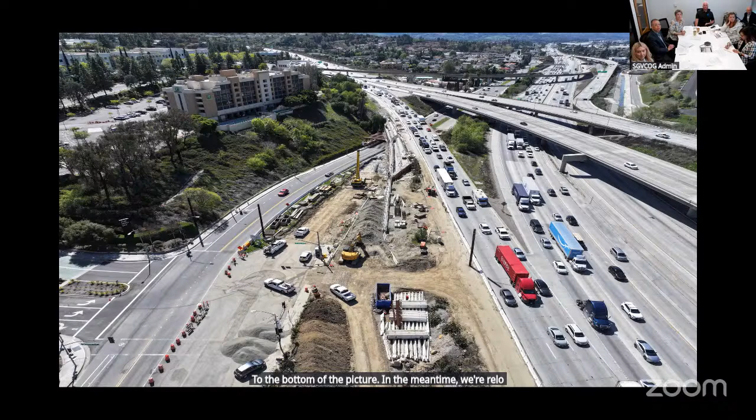This is a little further north of that bridge. That huge vertical cut is retaining the parking lot and the soil behind it, but you can see the walls taking shape. That gives us the area to start building the bridge. If you've driven out there, you've seen the big rig driving huge steel piles into the floor, about 125 to 130-foot piles. Once we drive those, that allows us to build the base for the retaining wall, and they'll start taking shape. That is the 57 northbound in its future alignment. That cutout next to the hotel is going to be the bridge column for Grand Avenue.

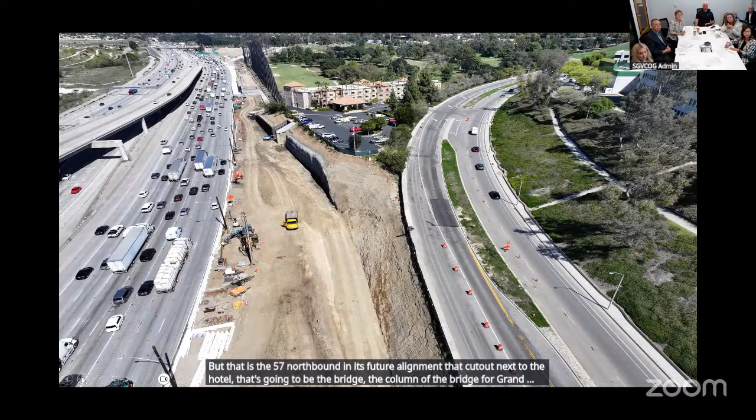Next slide. As we head towards Grand Avenue, we completed a huge milestone. We were able to get Edison to complete their work. We've been fighting for resources ever since the fire, so we've been working weekends and nights over the last couple of days. They finished the cutover. The only thing left is for us to do the wrecking, which we can probably do.

But as you can see, the grading is starting to take shape. In the coming months, we're going to shift traffic towards that new dirt area once we pave it, and that's going to be the new on-ramp and off-ramp for the freeway. Edison's out of the way, so hopefully that clears the schedule. I can take any questions on 5760.

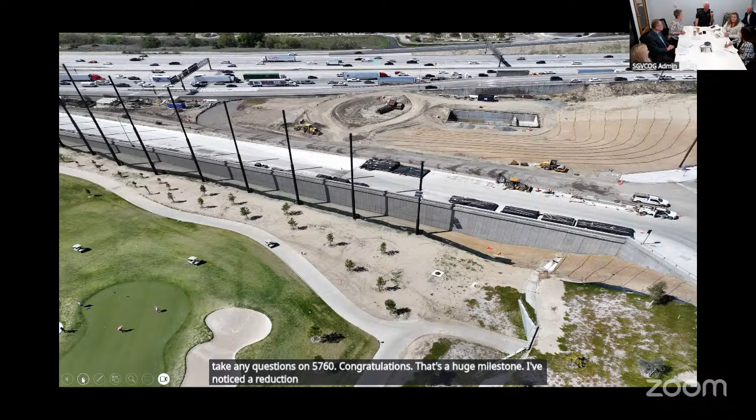That's huge, congratulations on getting Edison. That's a huge milestone. I agree. I've noticed a reduction in traffic too coming down south into the bowl. It's not as bad as it used to be. I don't generally jump on because I go through Diamond Bar to spend my money.

Thank you very much, we appreciate it. But honestly, it is smooth, not a lot of stoppage. You still have the crazy trucks, way too many trucks, but that's just the way it is. You guys are doing a really good job. It's looking good too, and it's clean.

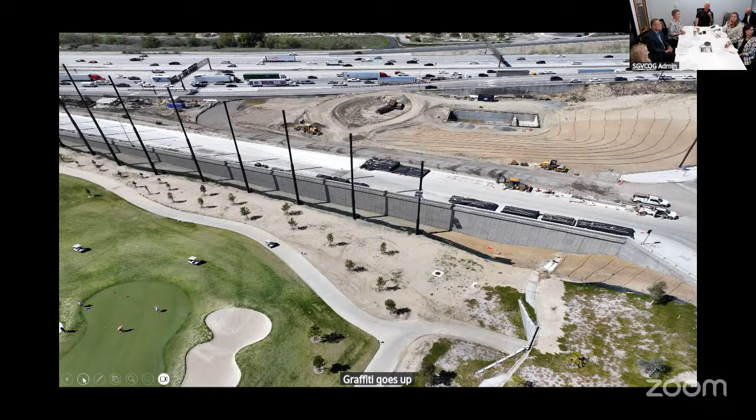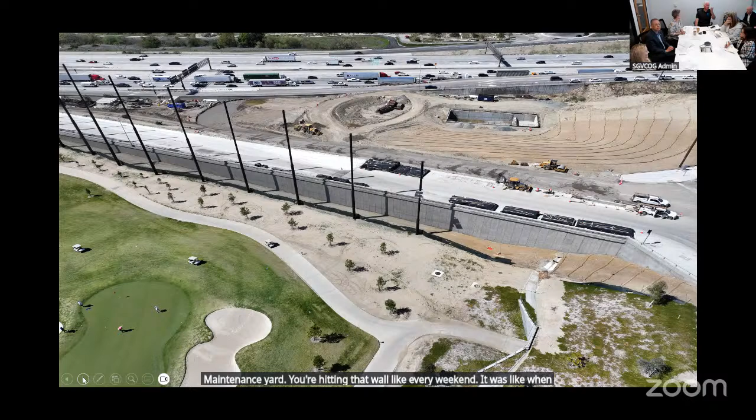You guys are keeping a clean job site. Graffiti goes up and it's gone in seconds. Everybody's on it, like the next day I'm going, hey, that was there. We had a 20-foot long by 8-foot wide graffiti mural on one of our new walls, and you have to power wash it off. They were hitting the maintenance yard, hitting that wall like every weekend. Anyway, you guys are doing a great job. Thank you, thank you, yeah, looks great.

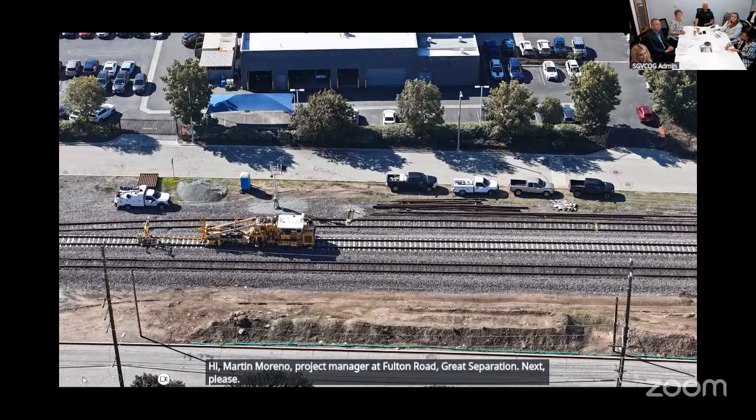As you all know, we've been trying to schedule with Union Pacific to schedule the cutover. This picture was taken approximately...

Did you say Union Pacific or Jesus? Just checking. Well, they showed up.

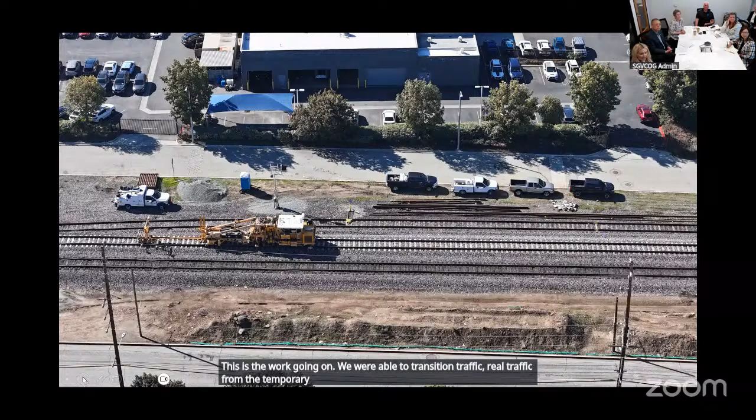They showed up approximately 30 days ago, the weekend of the 8th and 9th of March. This is the work going on. We were able to transition rail traffic from the temporary shoofly over to the new main lines that were recently constructed. And this is UP doing the work.

UP insists on a 30-day seasoning period where they want to make sure the tracks perform as designed before they allow us to remove the shoofly. So we should begin reviewing the shoofly removal. 30 days is Wednesday. Next slide, please.

Once again, these are the pictures there. As you can see, this is 99 Ranch Market. This is the shoofly to the left, and the new tracks to the right that we're extending to the new main lines. That's the Nogales Bridge to the top, where it reconnects back to the main line.

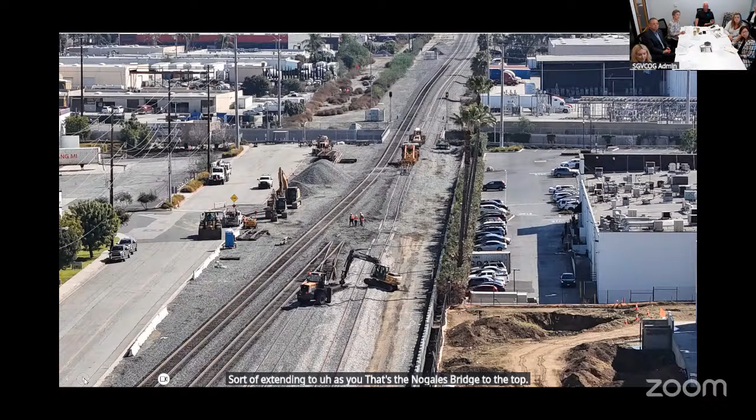Next slide, please. Once again, you can see the new rail traffic on the actual UP bridge. The way we did it, we built the south half of the bridge first, so there's main line 1 and 2 on the south half. Once we remove the shoofly, we will construct the north half of the UP bridge.

We should begin work to remove the shoofly on Wednesday. Currently, in order to try to regain some of the time we've lost, we will be doing the removal of the track at night and then the hauling away of the track during the day.

We're doing that to get around UP's moratorium - you can't do any work on their right of way between 4 a.m. and 11 a.m. So we're trying to do that work at night, remove the tracks off the right of way, then have the track transported away. Once it's off their property, that's allowable, so we don't need a flagger at that point.

What's your time frame on the digging of the other side? As far as getting everything dug out and starting to put steel and concrete in on the other side?

Condon Johnson - what happens is, see these big piers that are here, those are probably 72 to 96 inch piers. That work will start on the 15th of next month.

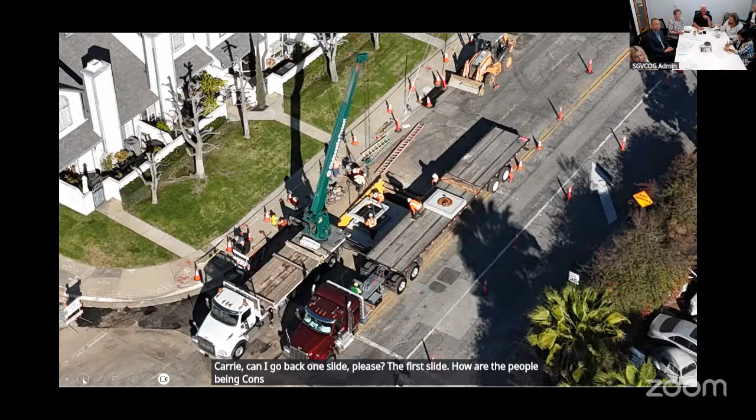Carrie, can I go back one slide please, the first slide. How are the people, considering this construction is in their front yard for a long time, how are they handling it? I know we're doing outreach, I saw your outreach stuff and I know you're giving information.

So it's been quiet, I think people are getting used to the construction in their neighborhood. It doesn't mean we've stepped back our efforts, we're still there, Maria Cano is still there every day. In fact, she'll be out there again this week because we're doing a cutover for one of the water lines, which is gonna require a shut off. Shut down? Ooh, how long?

Like a night, like 24 hours. Just make sure it's after shower time please. Wait, we're 24 hours? We're trying to provide nice porta potties, like the kind you see on a movie set, the ones you walk in, they're nice, have air. Yeah, whatever you gotta do, be gentle.

I have the electeds, we haven't heard anything. I don't know if Marissa or Director Liu have heard anything from the electeds in Montebello, it seems like things are going really well. I just wondered because this has been months and months and months, and if it's quiet, that's a huge testament to how staff and the outreach is going. Agreed.

Plus the lawns are, kudos, great job, look at the lawns. Yeah, the lawns are great. Okay, sorry, we just- Mr.

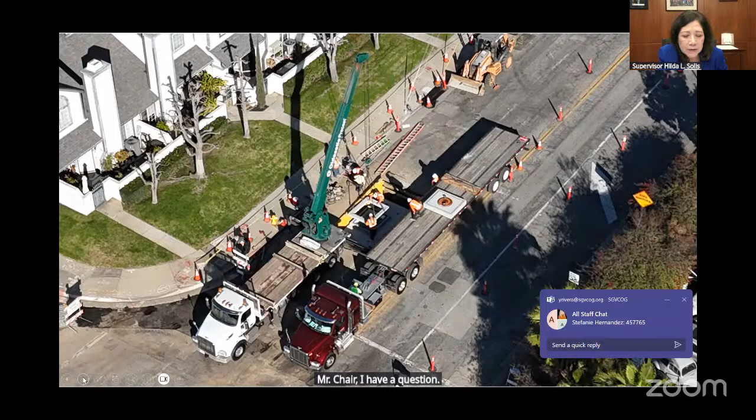Chair, I have a question. If water is gonna be shut off, are we doing anything to give water bottles or some kind of incentive there to help folks out, in addition to the porta potties? Yeah, that's a good question, Supervisor Solis. That's something we should probably look into, making sure they have bottled water, or at least a case of bottled water each, just to get them through the day. It'd be nice just to drop it off.

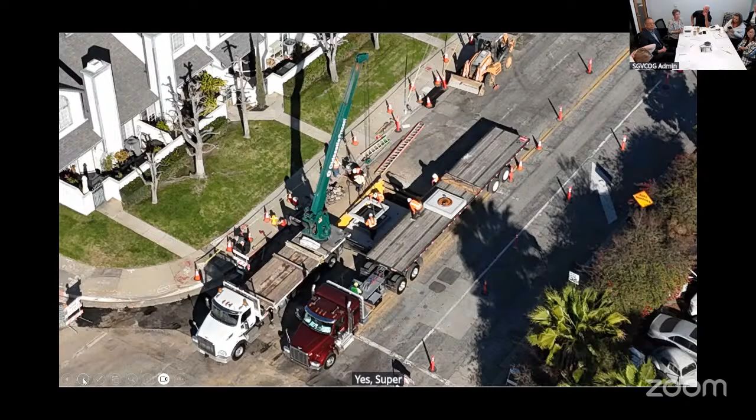Maybe put our COG logo on the bottle. Not a bad idea, cooking or something. Yeah, just saying, let's brand it. Yes, Supervisor Solis, we can definitely look into that. Okay, thank you.

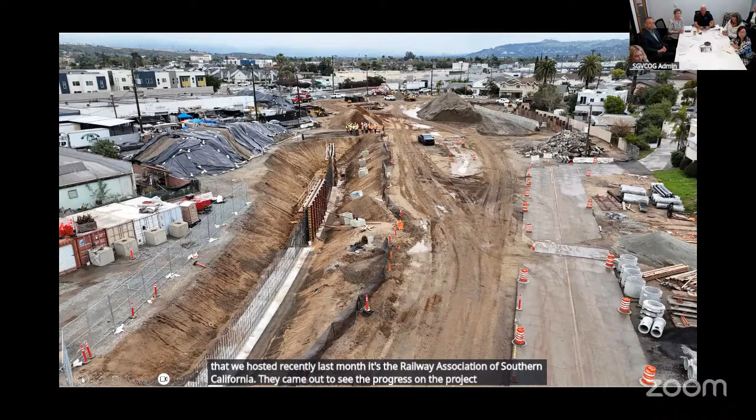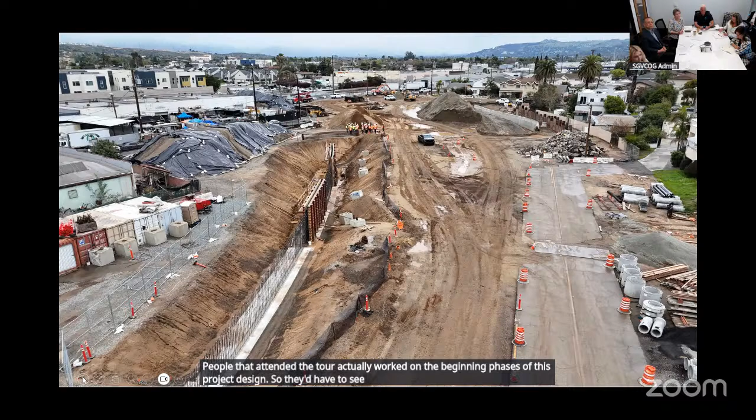That was a tour group we hosted recently last month, the Railway Association of Southern California. They came out to see the progress on the project and are very interested. A lot of the people who attended actually worked on the beginning phases of this project and design, so they're happy to see the project coming to fruition.

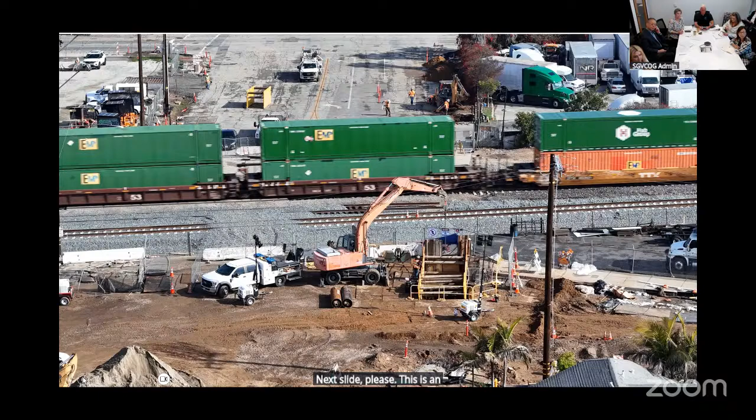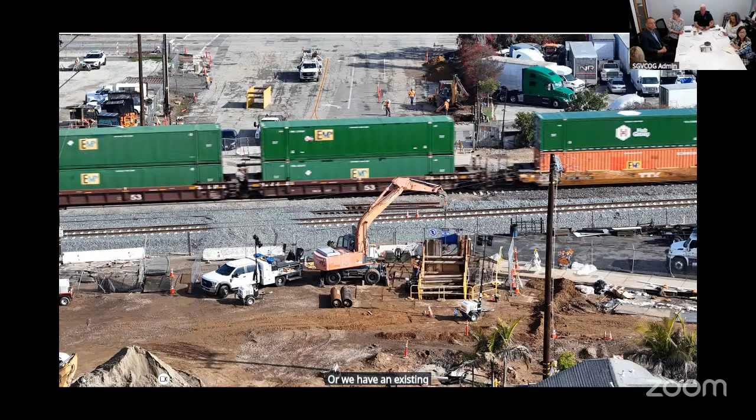Next slide please. This is an Edison milestone, the jack and bore being done. I spoke about it last week, where we have an existing overhead line on the west side of the intersection, and we're in the middle of relocating this overhead line to an underground position.

What you see here is the jacking pit where the casing with the auger in the middle is being lowered into the ground, being jacked under the railroad tracks. The crews you see up top, that's where the receiving pit is. That's a huge milestone for us - we couldn't proceed with any work until this was done. We're super excited that this has been completed successfully, and it was an awesome experience to see it.

Is there one more slide even? Yeah.

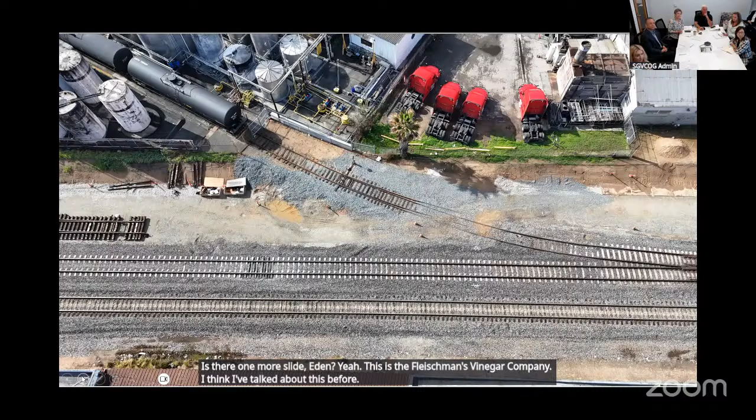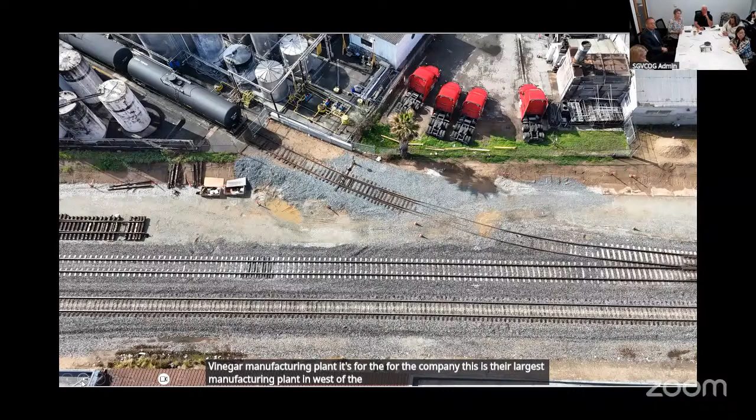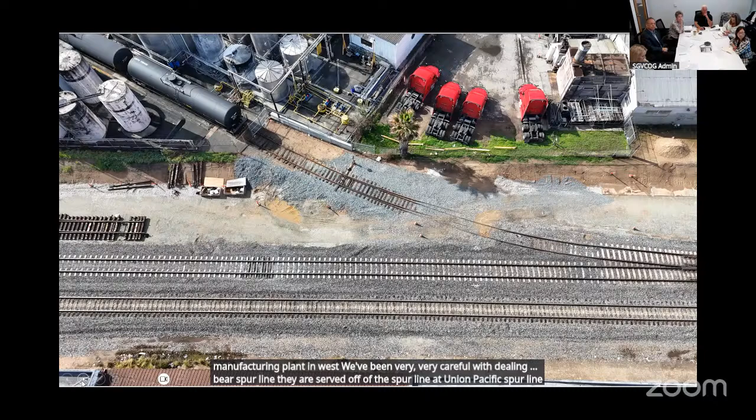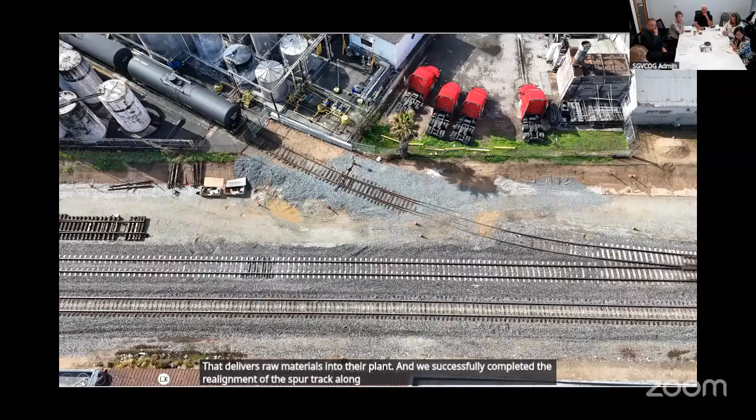This is the Fleischmann's Vinegar Company, which I've talked about before. It's a vinegar manufacturing plant, their largest manufacturing plant west of the Mississippi. We've been very careful dealing with their spur line - they're served off of this Union Pacific spur line that delivers raw materials into their plant. We successfully completed the realignment of the spur track, along with some improvements to their plant in the form of a new fence and a new berm.

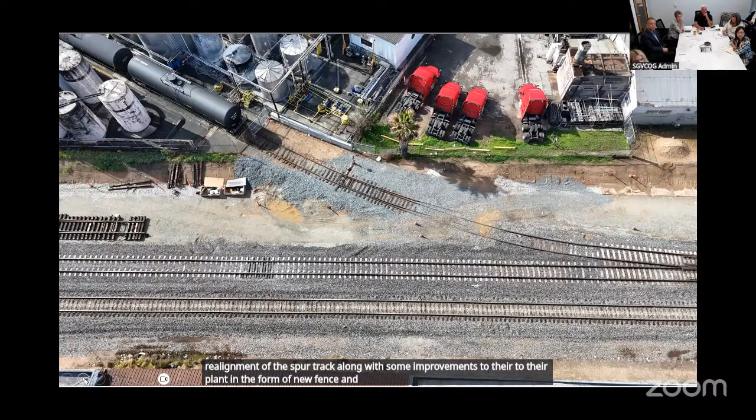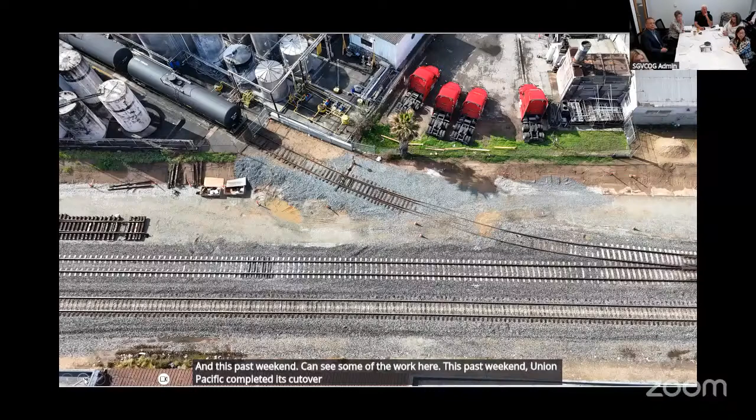This past weekend, you can see some of the work here. Union Pacific completed its phase 1 cutover of the mainline tracks onto the phase 1 shoo-fly line. So we achieved 2 major milestones in the last month with Edison and UP.

Oh, it's nice to see UP. Sounds like someone got into their ear and they're actually helping us. Thank goodness we have new electeds in those categories. So any questions for staff? Oh Lord, thank you, thank you Carrie.

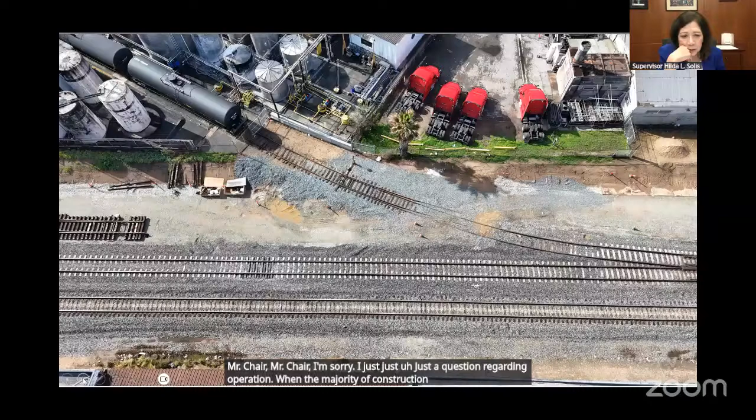Mr. Chair, I'm sorry, yes, just a question regarding operation. When the majority of construction is being done, is it in the morning until like 5 o'clock, 6 o'clock, or does it go on in the evening? I'm just wondering about noise for the residents.

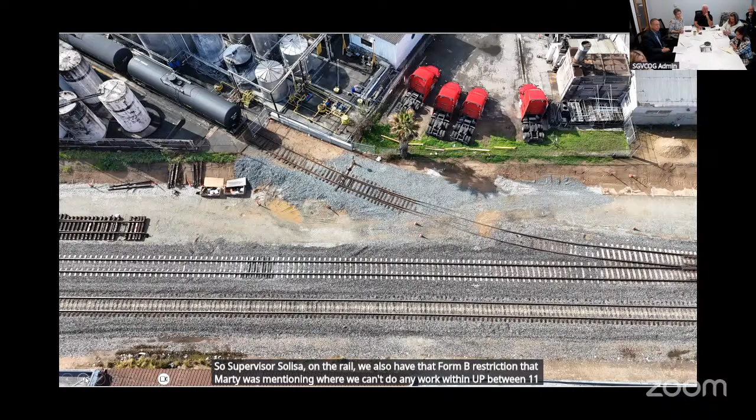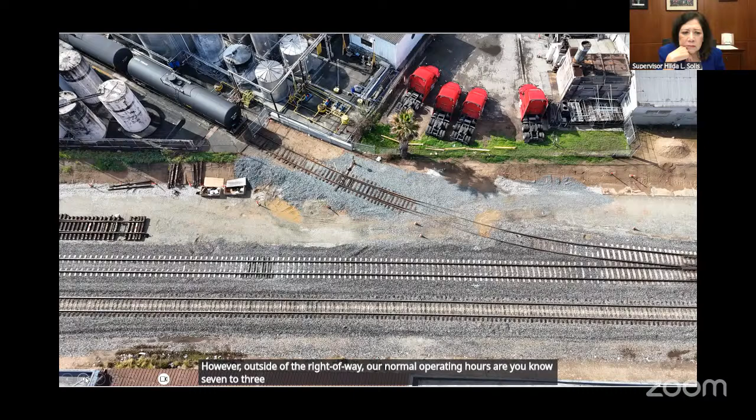Supervisor Solis, on the rail we also have that Form B restriction that Marty was mentioning, where we can't do any work within UP right-of-way between 11 a.m. and 4 p.m. However, outside of the right-of-way, our normal operating hours are 7 to 3, Monday through Friday. We have also been doing a little bit of work on Saturdays.

So no real evening work then - that's what I was trying to get at. No, no real heavy evening work, unless, a few months ago, we did have some evening work that needed to be done because there was a UP requirement for us to do a continuous bore. So that could not be avoided.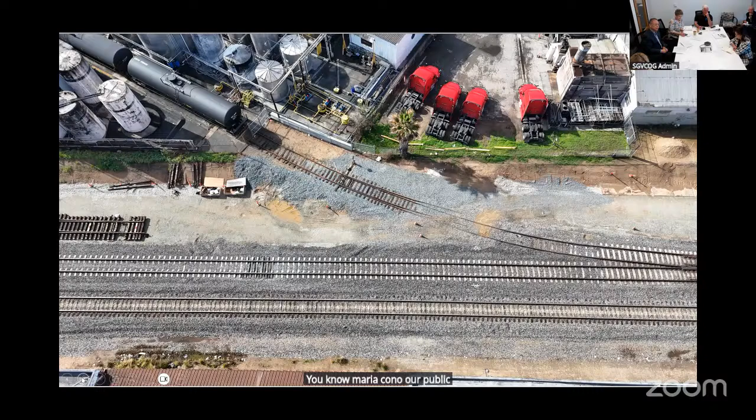Maria Cano, our public relations staff, has always been putting out the construction alert notices when necessary.

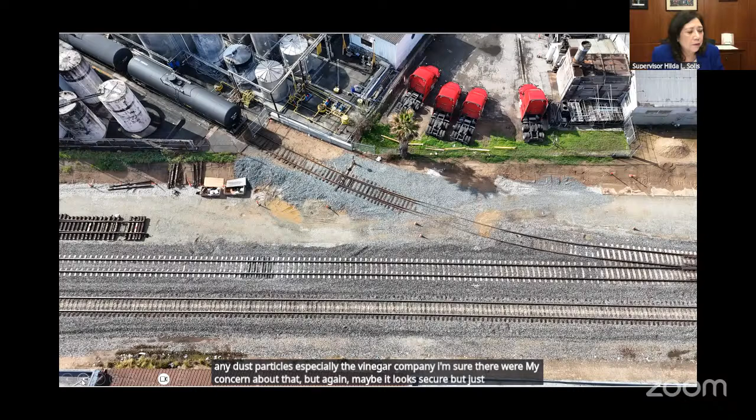And then just the last question about dust and containment of any dust particles, especially at the vinegar company - I'm sure they were quite concerned about that. But again, maybe it looks secure, but just wondering also about the households, about the downwind that comes down there, and the dust, and how we're maintaining all that with appropriate water, to keep dust particles down.

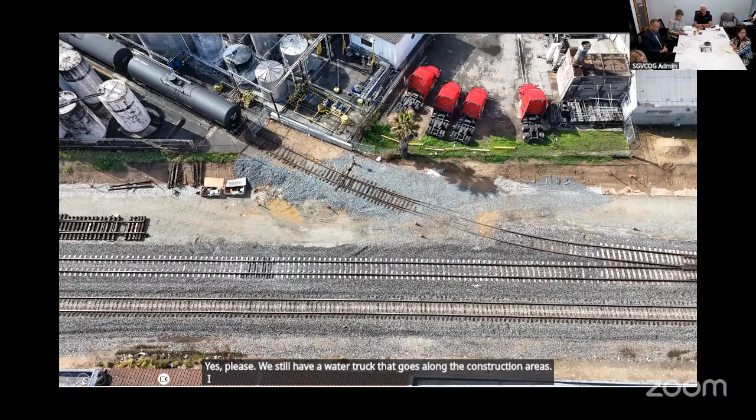Yeah, we still have a water truck that goes along the construction areas. I've seen it myself - they are always out there. Of course, March was a relatively wet month for us.

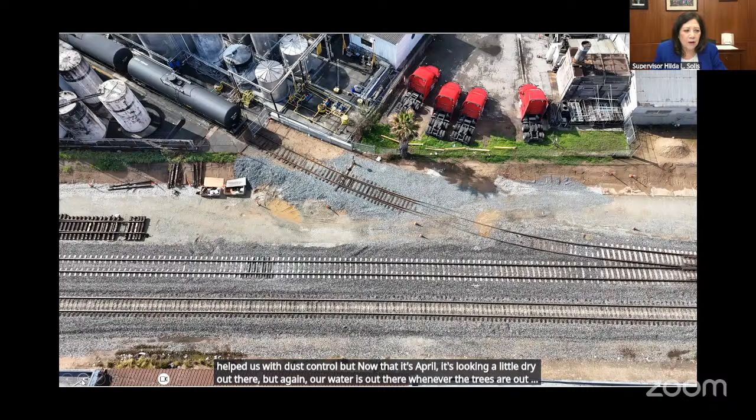Yeah, that helped us with dust control. But now that it's April, it's looking a little dry out there. But again, our water truck is out there whenever the crews are out there, as we get into the warmer days and the Santa Ana winds. But if you guys got it under control, that's great. We're hearing the water truck is out there impacting the entire day. I've seen them.

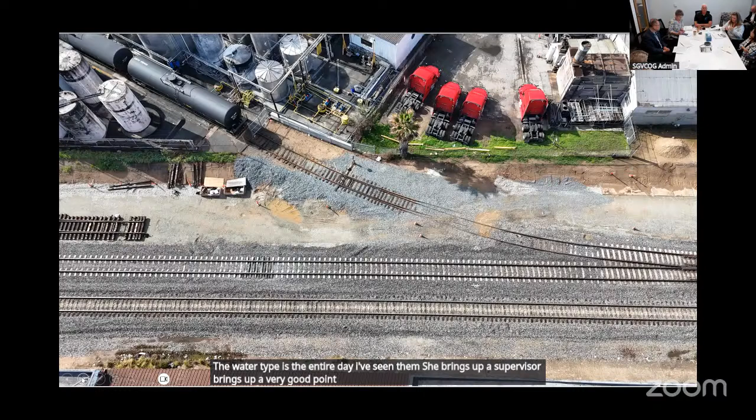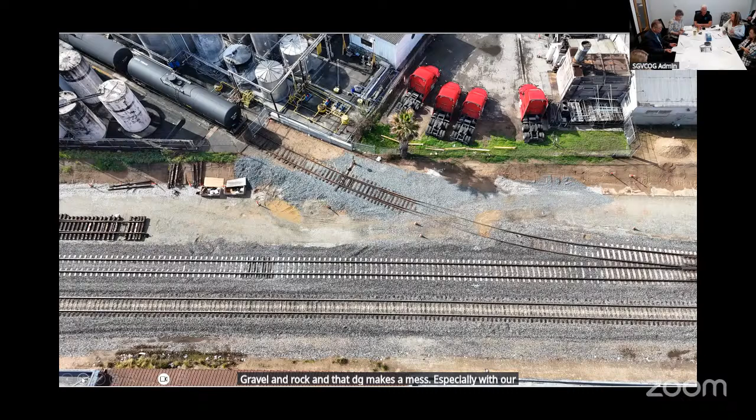Supervisor brings up a very good point. We want to make sure it's down to a minimum, especially on these spur track areas. If the gravel, rock, and DG get kicked up, that makes a mess, especially with our winds that come up every once in a while lately, for allergy sufferers like you. Thank you, Supervisor. That's a very good point. We'll make sure that they monitor that.

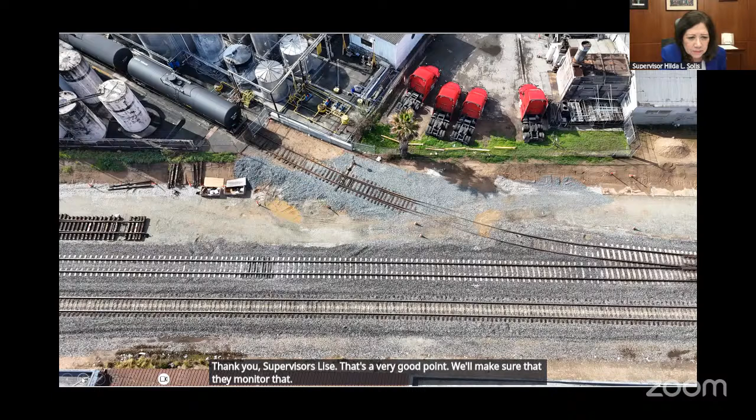Good morning, my name is John Che. I'm the project manager for Turnbull Canyon.

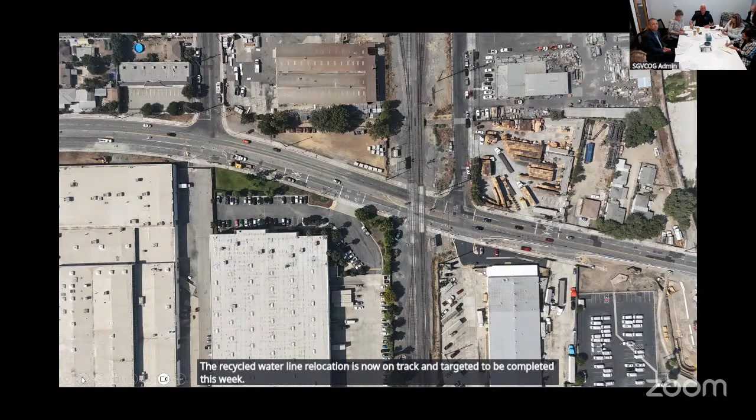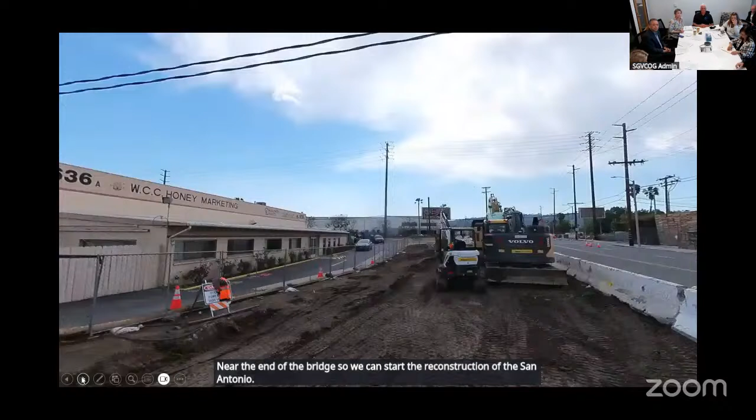We're also currently underway for the temporary construction easement area and the right-of-way area to complete the relocations of the sewer lines, which we're about 40% completed right now.

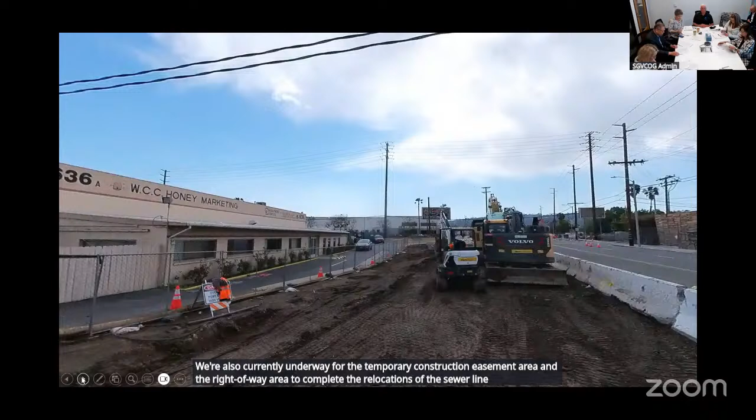And this is the storm drain line, the new relocated storm drain line. We're about 65% completed. This is about 5 feet by 6 feet long. Next slide.

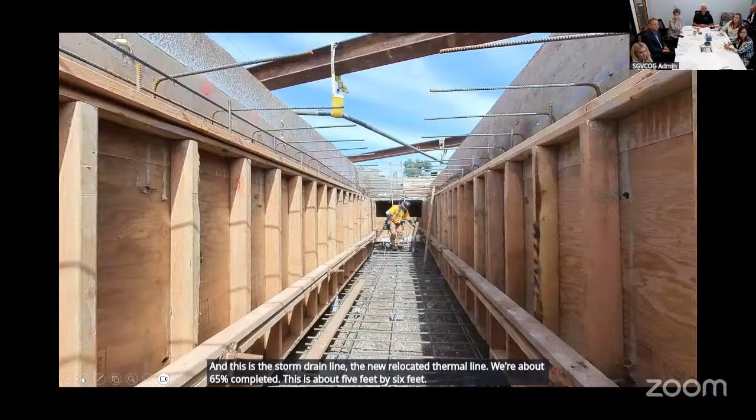And we implemented the detour signs in anticipation and preparation for the relocation of the San Jose Bridge north of the tracks. So right now we're just closing the area by the tracks, so you cannot cross the tracks, but you can relocate and detour around the track area. I think that's the final update.

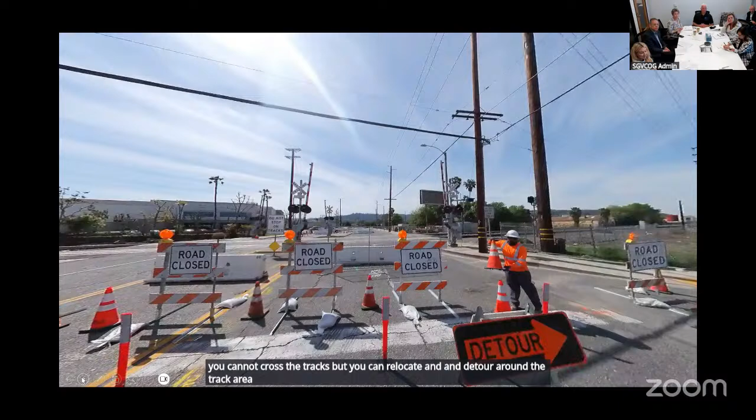Very good. Any questions for staff? Looks like it's moving along. Thank you. That's all we have. That's it? Yep, thank you very much. Good progress, glad to see UPR is on board again. Finally, thank God. We move to my report.

Early last month, I had the opportunity to travel to Washington, D.C., joined by CPCC Chair and Vice Chair Ed Reece, to advocate on behalf of the COG's legislative priorities and critical funding needs for key regional projects. We held a series of productive meetings with members of Congress and staff from our San Gabriel Valley delegation, as well as with officials from the U.S. Department of Transportation and the House Transportation and Infrastructure Committee. Also during our visit, we shared updates on the Alameda Corridor East, the ACE grade separation program, our vision for ACE Phase 3, and the continued progress of the SR 57 Confluence project.

We were also joined by CPC committee members Cory Moss and Becky Shevlin, who were also in DC as part of the United San Gabriel Valley effort to demonstrate the strong coordination among our region's transportation agencies, which is very strong. We also were proud to co-host a reception with Foothill Transit and the City of Industry to thank our congressional representatives for their continued support. We had a great dinner and it was well represented.

Thank you to our director, Ms. Creter, and also to Industry and Foothill Transit for putting on a great meal. Congressman Gil Cisneros was there, Judy Chu sat with us and had dinner, along with staff from a number of the senators' offices. As competition for federal resources intensifies, staying closely engaged with our decision makers in Washington is very essential. We continue to do that with our San Gabriel Valley priorities top of mind.